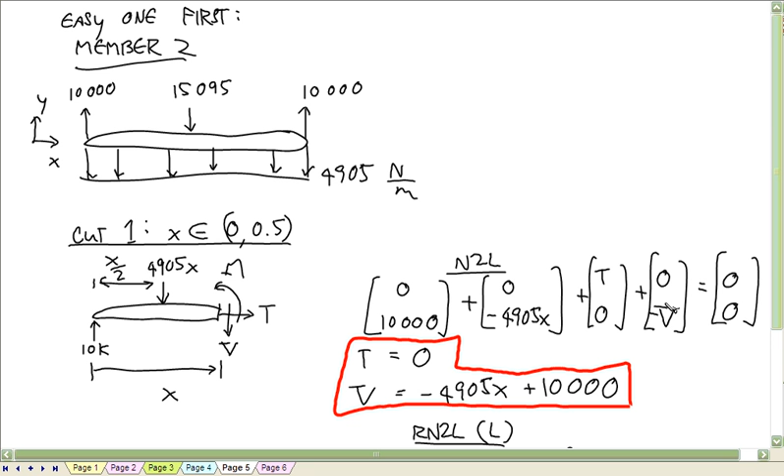Okay, so the first cut is for x anywhere up to before this downward force of 15,000. So we can treat that distributed load as acting at x over 2. That downward force is 4905x. And so the forces are, you have the 10,000 up, the downward force of 4905x, then you have tension and shear force. And so you get tension equals 0, shear force is this linear function.

And then the bending moment, so add up all the moments, and I'm going to calculate it, like always, about this left endpoint. So you have the bending moment minus V times x minus 4905x times x over 2. And so you get bending moment is equal to, and notice this is something that's always going to happen whenever you have squared terms in your bending moments. You're going to have two squared terms that partially cancel.

And that has the effect of, remember what I said about the derivative of the bending moment with respect to x is equal to the shear force, right? That subtraction is always necessary in order for that to work out, because when you take the derivative of something squared, you multiply the constant by 2, right? So anyways, so we get this negative 4905 plus half of that, and we end up with the bending moment is equal to negative 2452.5 x squared plus 10,000 x. Anyone get anything different than that they like?

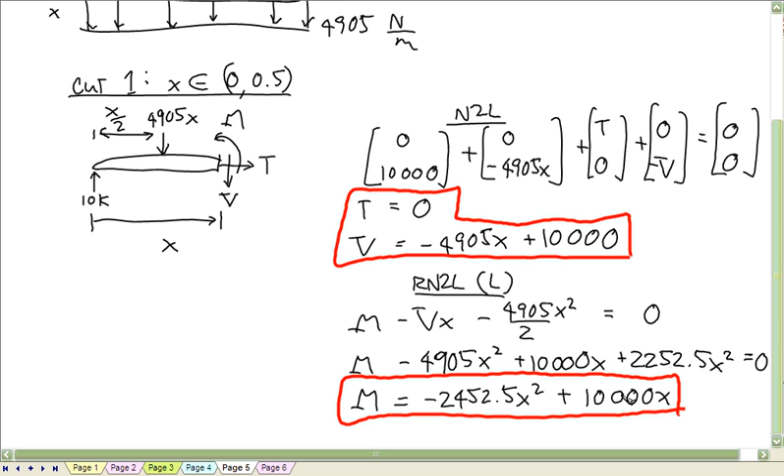Okay, and then the second cut. Now we're dealing with x anywhere from that downward force of 15,000 to the endpoint, not including the two endpoints of that interval. So our forces are 10,000 up, 4905x down. Now we also have that 15,000 Newton force down, and then tension, shear force, bending moment. So here are the forces: 10,000, 15,000 down, 4905x down, tension, shear force.

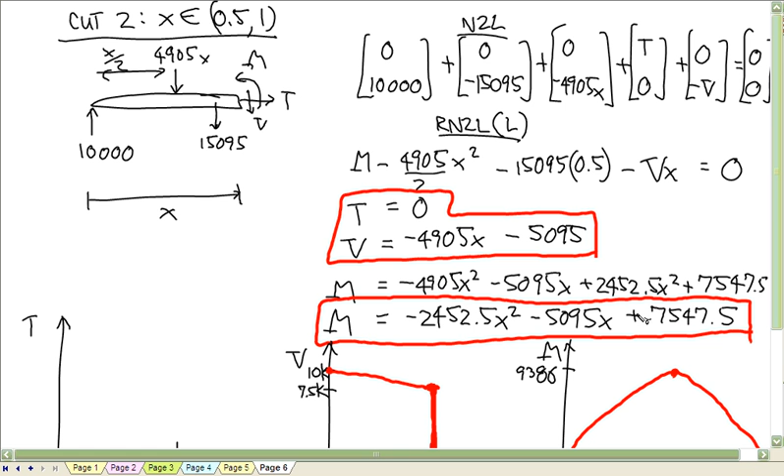And for the moments about the left endpoint, we have the bending moment minus 4905x times x over 2 minus 15,000 times moment arm of 0.5 minus the shear force times the moment arm of x. So you get a tension of 0, a shear force is this linear function. And then your bending moment, again, you get that subtraction of squared terms, and you end up with the bending moment is negative 2452.5x squared minus 5095x plus 7547.5. And these are the diagrams that you get.

So no tension anywhere. Shear force, what causes this jump? Yeah, you get a jump of 15,095 caused by that point force of 15,095. And then you have a bending moment that's a quadratic function. It's concave down going up to this point. Then it's continuous, but it's not differentiable at that point, right? You get that jump in slopes, and you get another concave down quadratic function going back down to 0.

And does it make sense that the bending moment is 0 at the two endpoints? And why should it be 0 at the two endpoints? No couple there. No couple at either endpoint. So really, the most likely time that you would have non-zero values for the bending moment at the endpoints is because you have some kind of cantilever or some fixed joint at the endpoints. Okay.

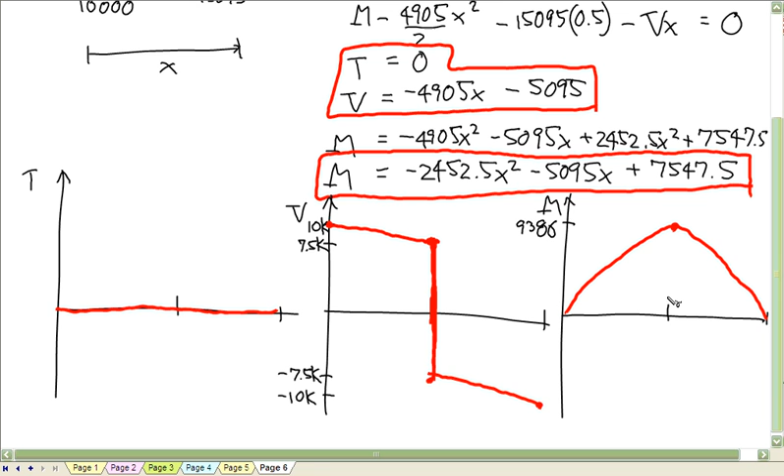All right. So the next one we have to do, well, we could go in any order, but I think the second easiest one is this vertical member. But in order to do that, we're going to have to think a little bit. So now we're going to do the vertical member. Member 1. And this has a horizontal, well, let's rotate it first. So this is pretty easy to rotate. I don't think there's any reason we have to use a rotation matrix.

But if we were going to use a rotation matrix, what is the angle that we would want to rotate our original coordinate system to represent this? So our coordinate system is like this, right? We want it to be like this with the x-axis pointing down, right? So it's negative 90 degrees, okay?

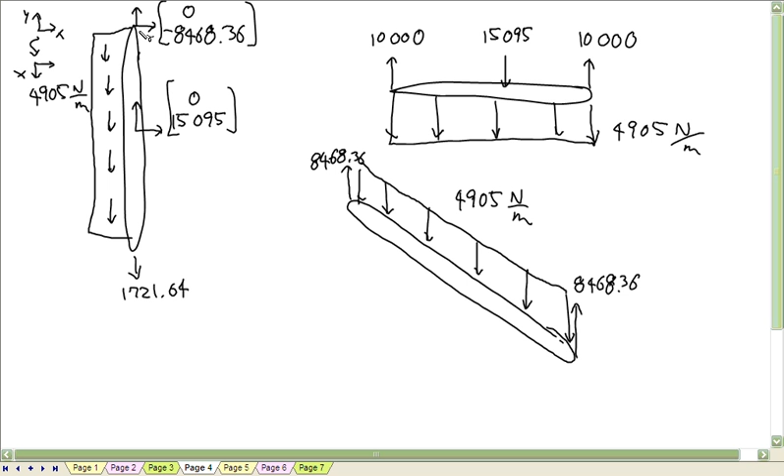So yeah, it's a very common thing for people to get these backwards because it's a lot more natural to think of rotating the member into the right position. But remember that what we're doing is really rotating the coordinate system into the right orientation, okay? So negative 90 degrees is what we want. So you could do this by multiplying all these vectors by cosine negative 90, sine negative 90, sine negative 90, cosine negative 90. But in this case, since it's a 90-degree rotation, you can eyeball it without too much trouble.

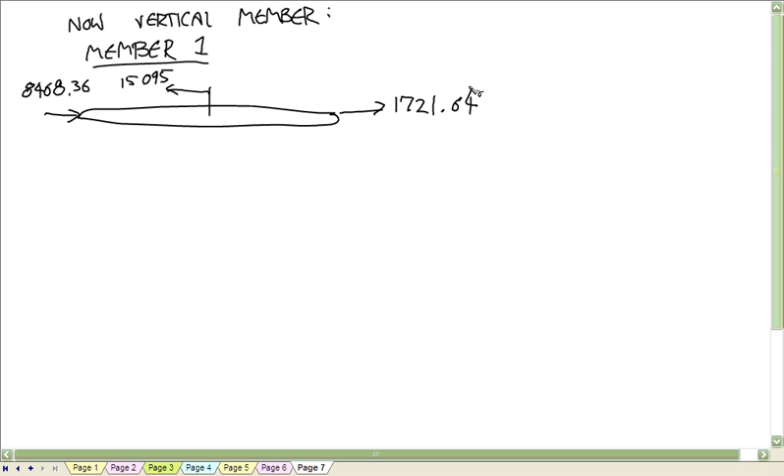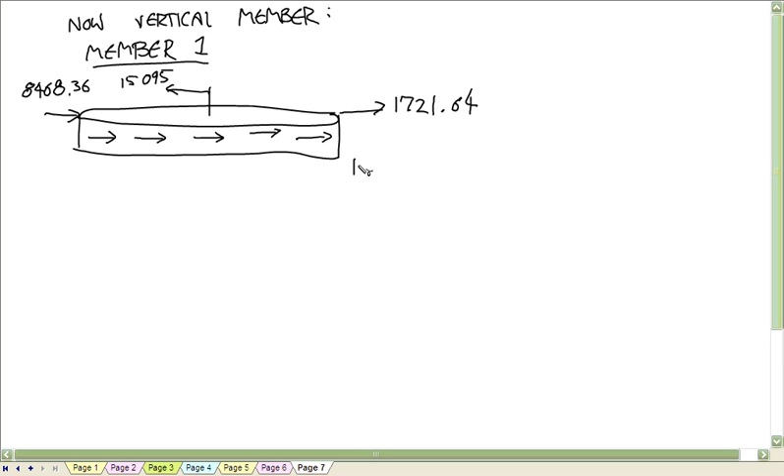So I rotated it to have that force of 8468 on the left. So you have a force of 8468.36. Then at the midpoint, you have a force of 15,095 pointing to the left. And then at the end, you have a force to the right of 1721.64. And the distributed load is acting along the length and has a magnitude of 4905 newtons per meter.

Okay, so each cut that we do, we're going to treat the distributed load as a point force, right? That's what we've always done with distributed loads, and that's still what we're going to do. So the question is, where do we put the distributed load? And I guess also, what's the magnitude and direction of that distributed load? But that one's pretty obvious, okay? We're going to express it as a function of x, and that one isn't too different from a vertical distributed load. But what is different is where do we put the point force, okay?

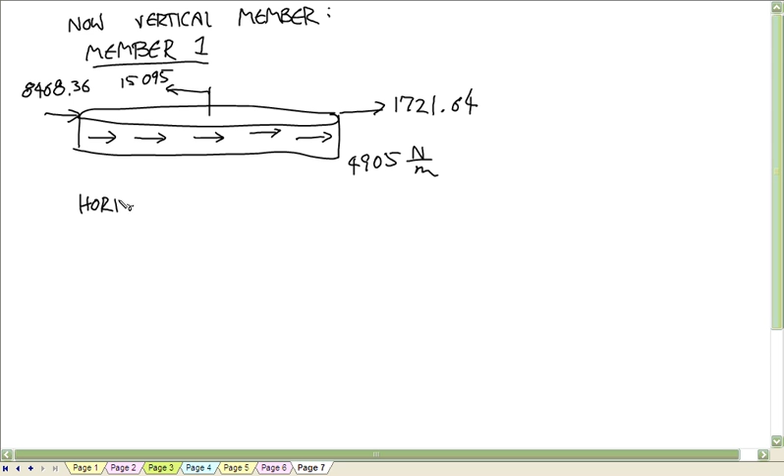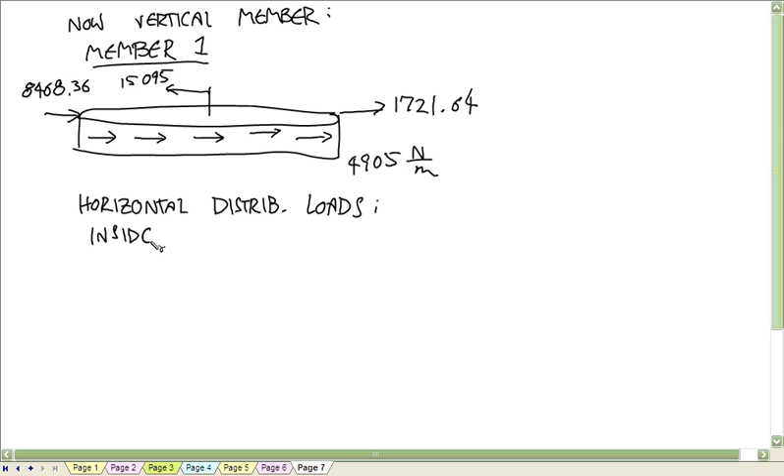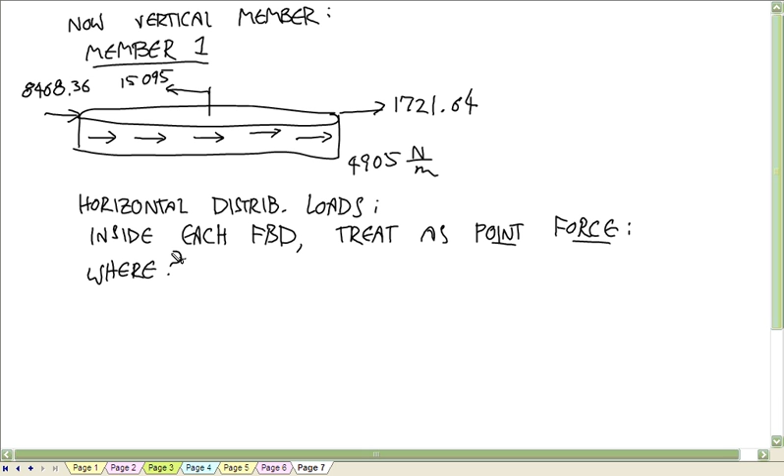So horizontal distributed loads. So inside each free body diagram, we're going to treat it as a point force. And the question is, where do we put it? Where is it applied? Well, there are two components to its position, right? So let's think about what's relevant to us. So we'll break up the position into horizontal and vertical components.

Okay, so what about the horizontal position? So say we have some body like this. Where are we going to locate this force along here? And the answer to that comes from, why do we care at all where this is positioned? Where does it matter? What equations does it even come into? Why couldn't we locate it in space somewhere? Yeah, it only matters for the moment. And so think about the moment produced about this point as you move the force here or here or here. What effect does it have moving that horizontal force around? It doesn't have any, right?

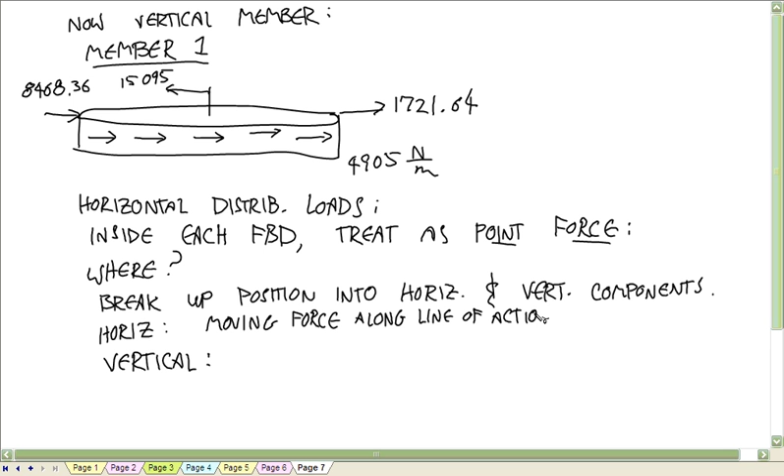We know you're allowed to move a force along its line of action without changing anything about what it produces, right? We do that whenever it's convenient. So moving a force along its line of action is okay. So this doesn't matter.

Okay, so the next question is, where do we locate it vertically? And that really has to do with what's causing the distributed load. So what's causing the distributed load? If it's being caused by some kind of traction, some kind of force along the surface of the beam, then we're going to want to position it along the surface of the beam. And if we're trying to be really precise and the surface of the beam is 4 centimeters from where we're calculating our moments, then the vertical position is 4 centimeters above or below. In most cases, since these beams are way longer than they are thick, it's pretty reasonable to neglect that, but I think it's good to know how you would do it if you wanted to be exact.

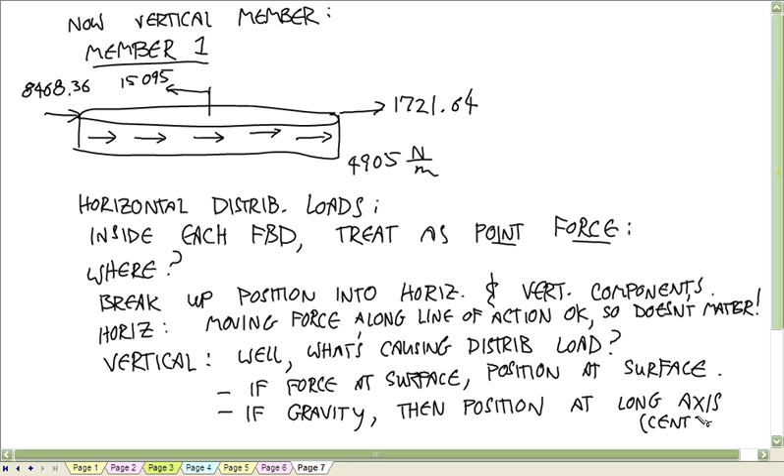Technically, it could be distributed that way too, right? Oh, yes, you're right about that. You're exactly right. So if we're doing this for some crazy shaped beam, then you'd have to worry about that. So yeah, that's a good point. Let me change that to centroid. But for the problems we're going to do, it's just going to be along the long axis of the beam. Okay. So that's all we have to do.

And when you think about it that way, these are actually easier to calculate than vertical distributed loads because we don't have to worry about finding the centroid of some shape, because the centroid of the shape would be used to give us that horizontal position, and that doesn't even matter. Okay. So next time I'll do this one, and then you in groups will combine the vertical and horizontal and do that hard one. Okay.